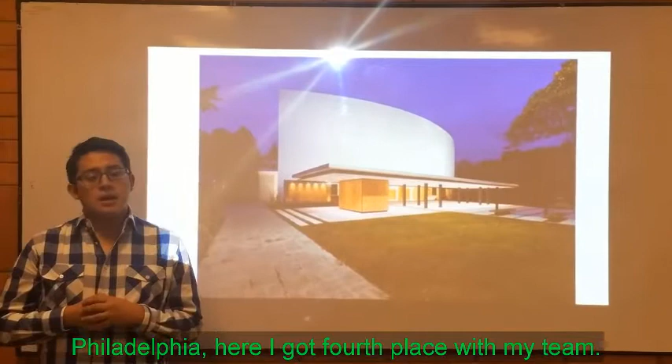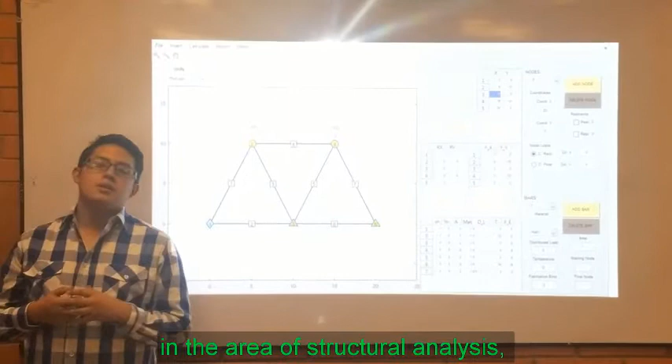Hello, my name is Jose David Serpa. I'm 22 years old. I was professor assistant at my university in the field of advanced geomatics. I also participated in the fourth national competition of highly workable mortars and in the international competition ACI Mortar Workability in Philadelphia, where I got fourth place with my team. I'm currently the president of the ACI student chapter of my university. One of my greatest aspirations is to be a high-level professional in structural analysis, with the objective of developing tools that allow adapting and applying new technologies in structure calculation.

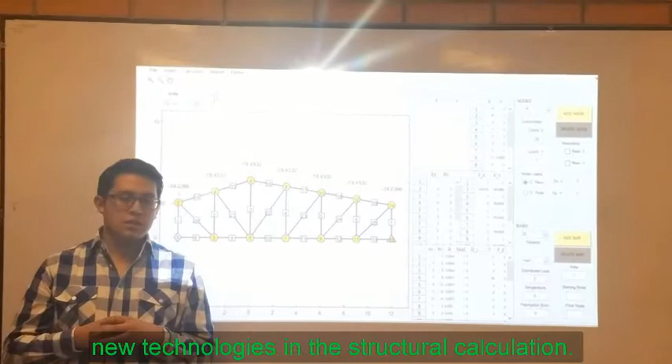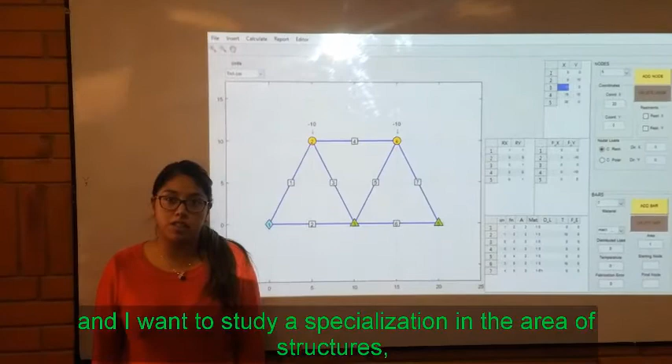Hello, my name is Diana Vasquez. I am 22 years old. Now I am a professor assistant. I am a member and co-founder of the ACI student chapter in my university. I am also the author of several articles published in the journal of my faculty. Now I am in the 8th cycle of my major and I want to study a specialization in the area of structures, so from now we have developed and empowered our skills to achieve it with the creation of this program.

My name is Martin Isaac. I'm 20 years old and I am in the 8th cycle of civil engineering. I am interested in the structural engineering field because it's difficult and that challenged me to improve. Designing this analysis program was rewarding because it involved our imagination and developed some of our skills. I want to finish university and study a specialization in structural engineering.

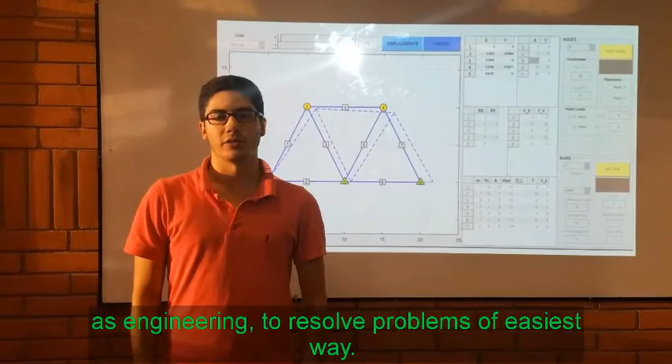Hello, my name is Cristian Picao. I'm 22 years old and I am in the 8th cycle of civil engineering. I study civil engineering because it's what passionates me and I would like to be a great professional. With this project, I could see the potential of a technical career like engineering to resolve problems in an easier way.

Let's start. The program consists of a main window where you have the option to choose the units at any time during execution. The materials to be used can be modified from the Editor tab in the Edit Materials option.

Here you can create or delete different materials that the structure has. There is also the option to perform linear and nonlinear analysis of the structure.

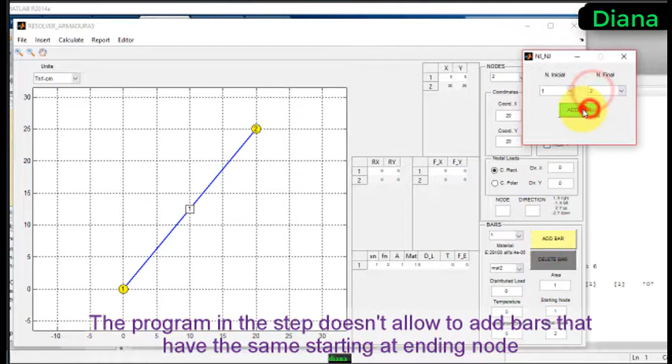If you choose linear analysis, you must add nodes and bars manually. If you make a mistake when placing them, they can be removed at any time. The program at this step doesn't allow you to add bars that have the same starting and ending nodes. All the properties of each bar and each node can be modified from the tables or from the respective tabs.

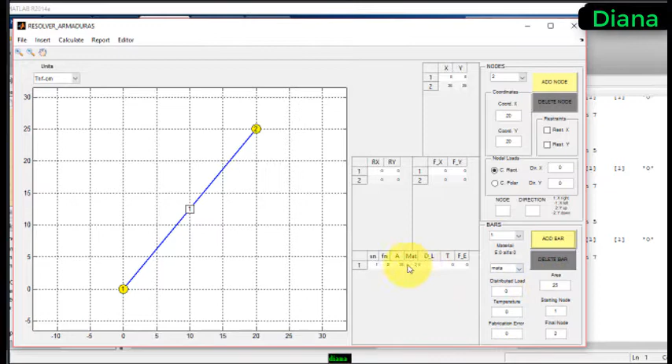When we choose the nonlinear option, we choose the node and the direction of the analysis to be able to perform the calculations. In the program, you can also load previously created files.

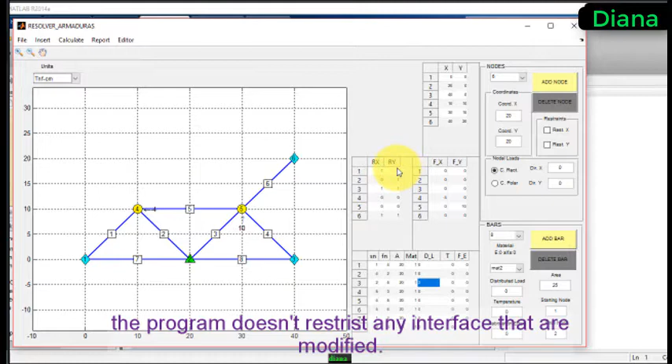The program does not restrict you from modifying any interface. For example, you can assign a load to node 5, a vertical load of 5 tons, and delete the distributed load first from bar 3.

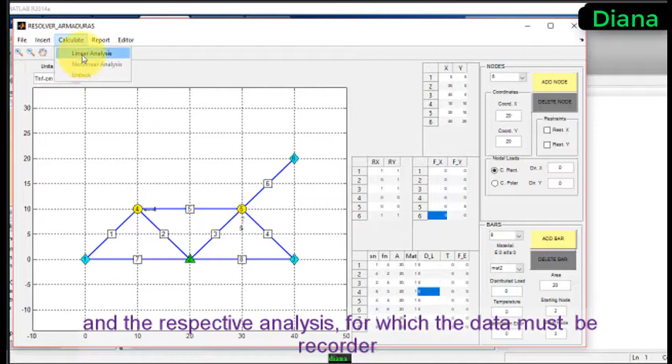To perform the analysis, select the Calculate tab and the respective analysis, for which the data must be recorded.

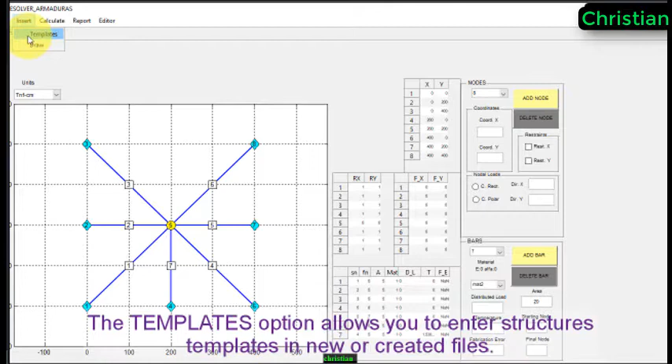To enter a new frame in a more efficient way, use the Create Templates option, found here in Insert, under Templates and Draw. The Templates option allows you to enter structure templates into new or existing files.

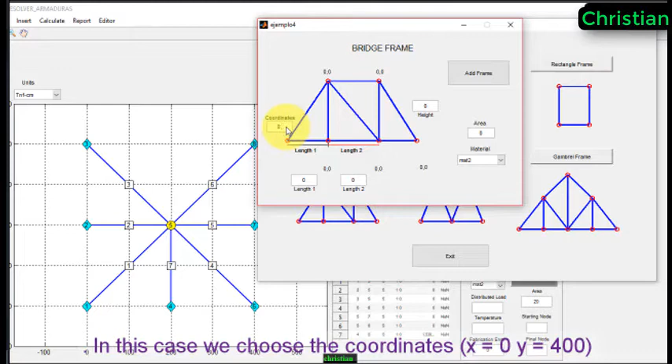For example, if we choose Bridge Frame, it's necessary to enter 4 parameters: the coordinates of the starting point, which can be located at any point on the plane, including existing nodes. In this case, we choose the coordinates x equals 0 and y equals 400, and lengths 1 and 2, such as 150 and 250 respectively.

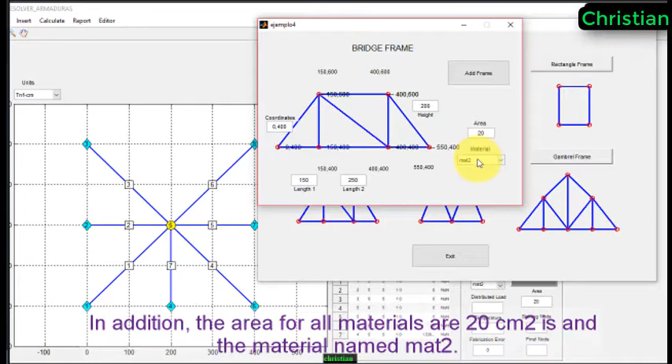The height of the frame will be 200. In addition, the area for all materials is 20 square centimeters, and the material is named Mat2.

If you want to preview the frame, click on the Add Frame button, where we can verify if the data entered are correct. To delete the frame, you must choose the delete option. Once the necessary changes have been made, the structures should be saved.

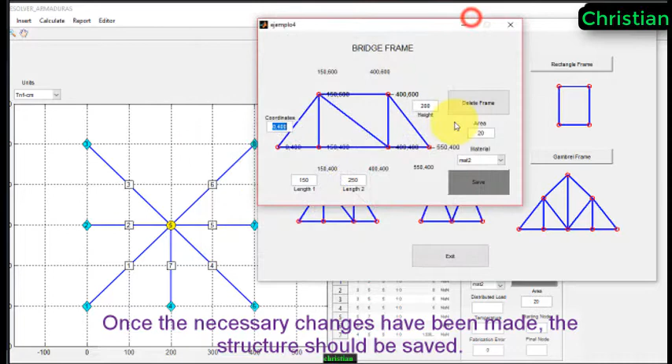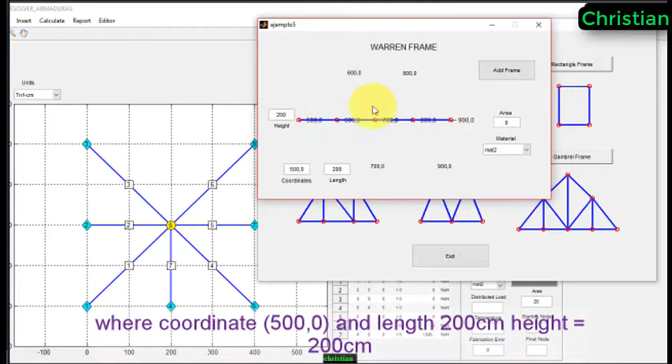You can choose various frames, like a Warren frame, where coordinate is 500, the length of 200 centimeters, and the height equal to 200 centimeters. Area of 5 square centimeters and the material 2.

When all the templates have been added, we press exit. As you can see, the arrays are created and the structure is ready to be analyzed.

Another way to insert drawings into our program is with the menu Draw. In this option, we can add nodes with double click, and we can add bars with clicks.

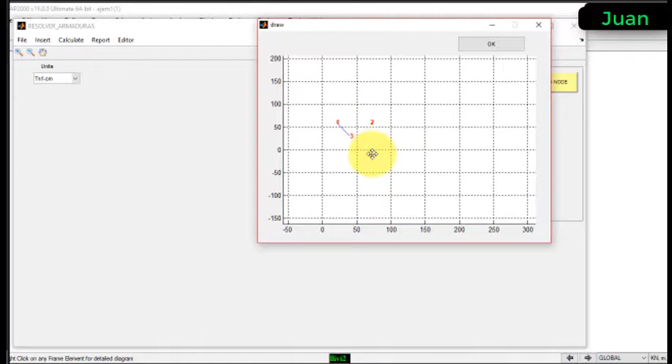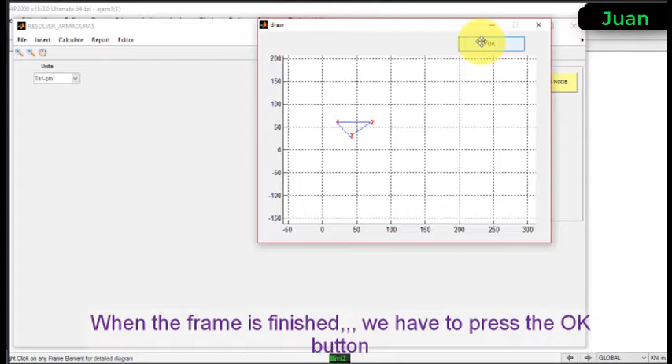The program can zoom to set the points that agree. We can delete nodes or bars. When the frame is finished, we have to press the OK button and the data is added to our main window.

When we choose the linear analysis option using any method of data entry, we can run the linear analysis. For example, the network structure where only node 5 has movement freedom. The applied loads are 45 tons in the x direction, and there exist loads on elements 1 and 7.

The distributed forces can be placed as a function of the length of the element, and the equation is calculated from the initial node to the final node.

When the structure is ready to be analyzed, the Calculate tab is chosen and the respective option is selected. In this case, the Linear Analysis option. So I have to choose the folder to save the files.

Within the analysis, all editing options are disabled, so you can see the movements of each node or force in each element.

An increase of the graphical scale of the force or displacements can be made if necessary. For example, for the displacement, we choose the next factor, or we can change the value. We can use the slider.

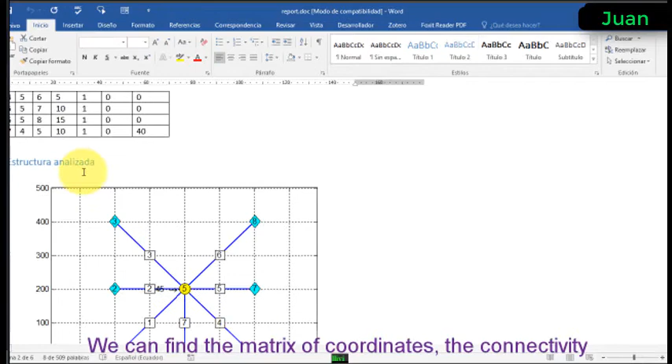In the report, we can see the data entry and the summary of the results of the linear analysis. We can find the matrix of coordinates and the connectivity, the graphical representation of the structure analyzed, the processing, and the results.

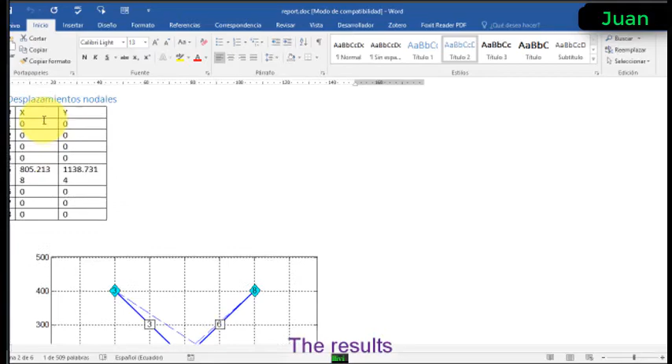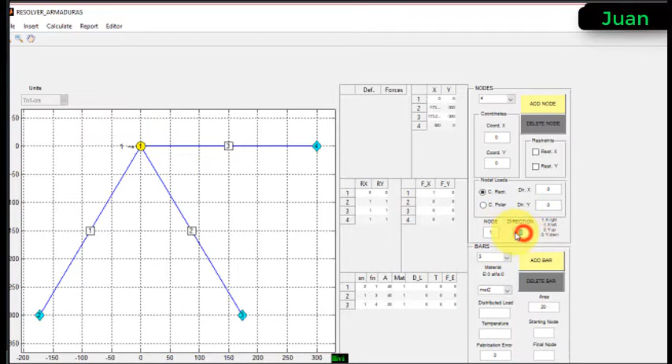If we choose the nonlinear analysis option, we can load existing files. In this option, we must choose the node and the direction in which you want to perform the analysis.

Then we must select the tab Calculate and the option Nonlinear Analysis. We must save the files.

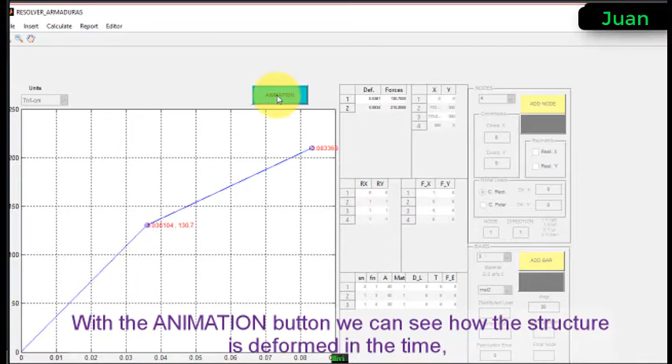With the animation button, we can see how the structure is deformed over time. In addition, the color change indicates the yielding of the bars, as well as the change of the slope in the graphs.

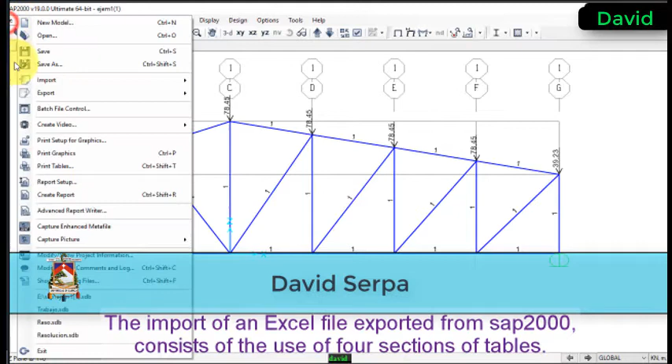The import of an Excel file exported from SAP 2000 consists of the use of 4 sections of tables: Connectivity data, which contains the connectivity matrices, coordinates, and nodal constraints of the structure. Joint assignments, which contains different types of loads on local or global axes.

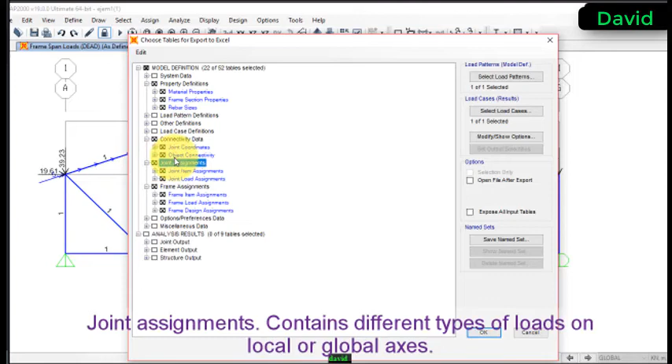Frame assignments contain data about section templates. Material properties has the properties of the material assigned to each section template of the different elements of the structure.

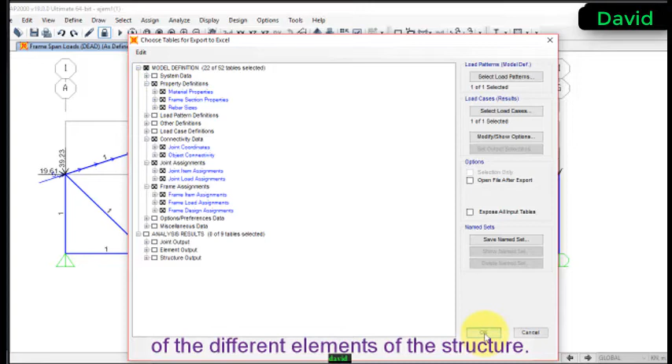Next, we save the file. In this case, the file name is example1.

The Excel file includes different sheets in which the structure information is stored in a special format, and it depends on the conditions in which the structure is located.

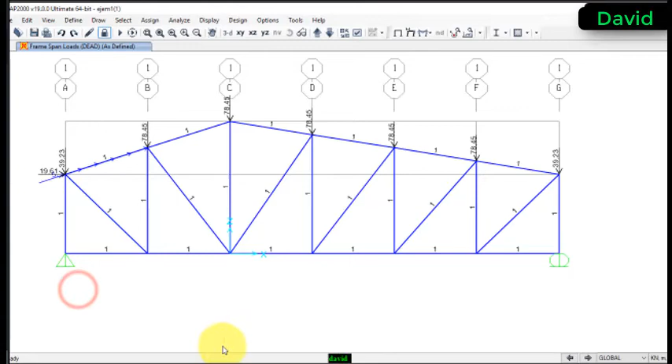Our program analyzes the SAP file and compiles the values to perform the analysis of the structure. Select the option File, press SAP 2000 Import, and choose the Excel SAP file.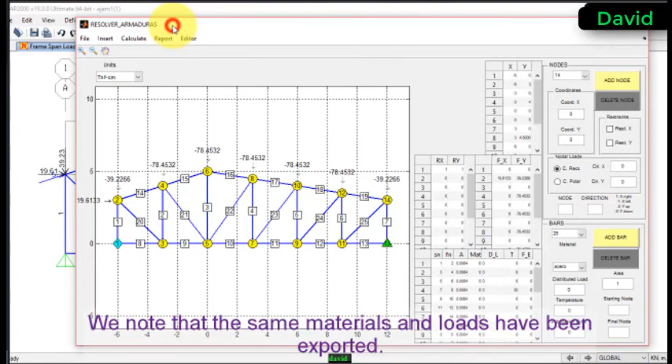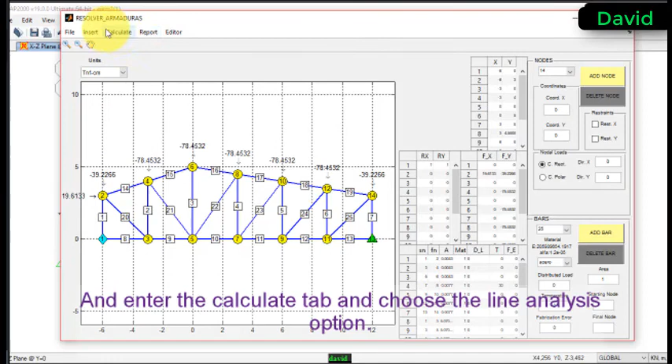We note that the same materials and the same loads have been exported. Enter the Calculate tab and choose the Linear Analysis option.

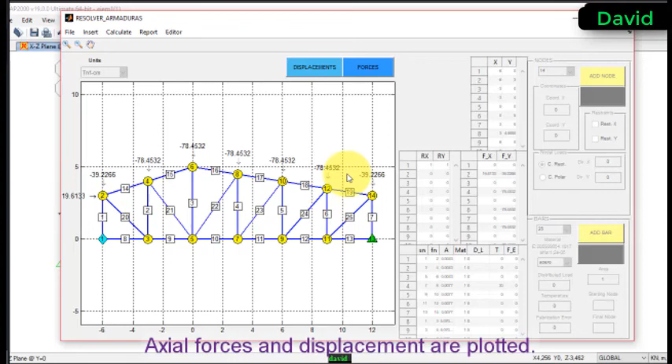Save the file, and the axial forces and displacements are plotted.

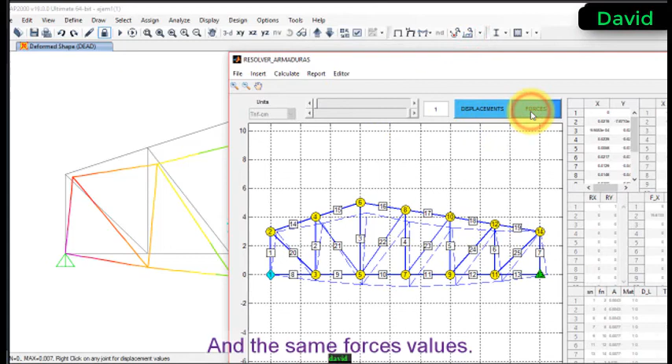We can see the same displacement, and the same force values. The color convention is different, but the values of the forces are the same.